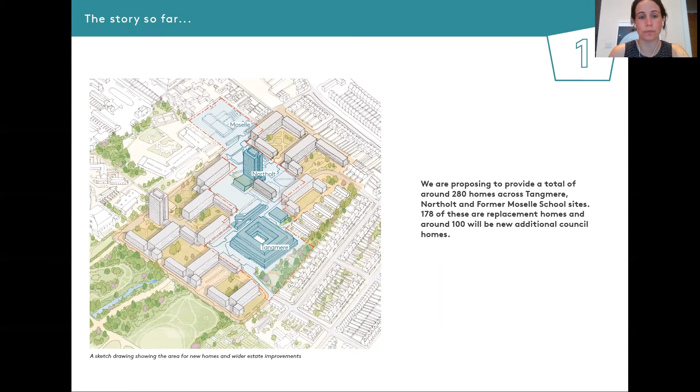In February, we presented 3 design ideas, and idea A was the most popular. But there were other elements of idea B and C that were also very popular, such as the open courtyards and creation of new safe streets.

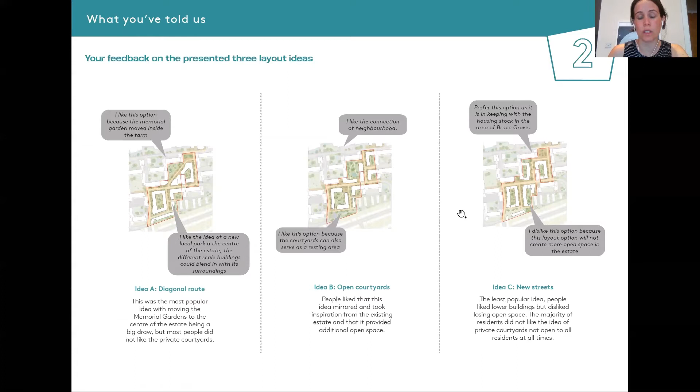We also discussed these 4 themes on the engagement in February. We talked about safe streets, active ground floors, improved open spaces, and high quality homes. All the feedback received has been processed and has informed the design evolution of the design scenarios.

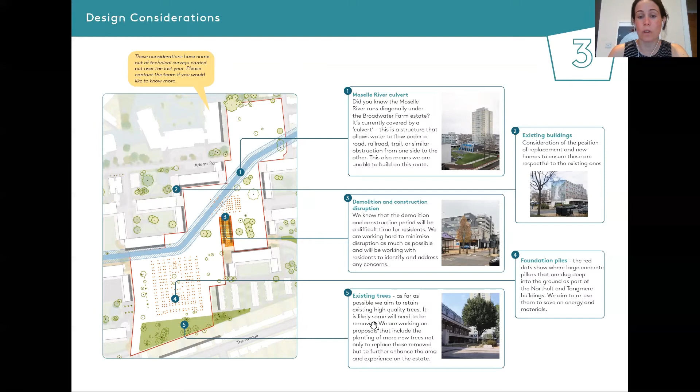We're also taking into account some design considerations across the site, such as the Moselle River running across the estate covered in a culvert, which means that we cannot build on top of the blue area. We're also being very respectful with buildings around the site area, as well as considering demolition and construction disruption, especially on Stapleford building. We're also looking at the existing foundation piles of Tangmere and Northolt, and we're looking at maximizing tree retention across the site.

We're also looking at existing policy and guidance, and the current parking situation, as well as current parking policies, are informing the design. We will talk in a second about our parking proposals for new buildings.

Based on the feedback received in February, we have refined the designs and merged them into 2 design scenarios. These 2 design scenarios have some differences, but they have some key priorities that are common on both of them. These are creating safe streets, having an active ground floor, including the reprovision of the health center, and potentially creating a new well-being hub.

Providing high-quality open spaces, including a new park at the heart of the estate, and providing high-quality council homes, maximizing larger family homes, as well as providing outdoor amenity space for all of them.

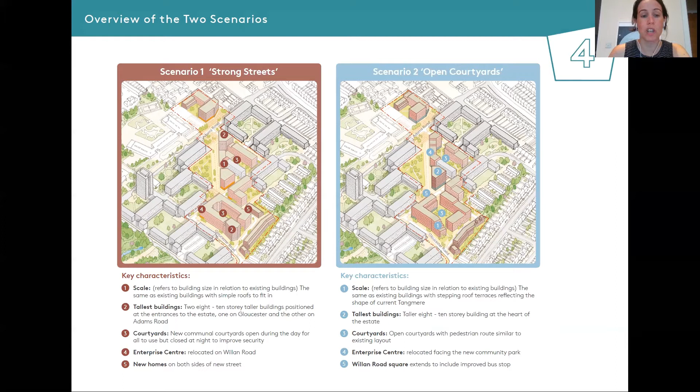But there are some differences. Listed below, you can read all the differences of these proposals. They include scale, location of taller buildings, shape and form of courtyards, as well as the location of the enterprise center.

In terms of streets and parking, we have responded to feedback received by introducing north-south roads that are more similar to traditional London streets, including activity at ground floor, such as front doors or other uses, wide pavements, tree planting, on-street parking, as well as vehicular lanes.

But we have also introduced a pedestrian-friendly street running diagonally from Adams Road to Willan Road. It would be great to hear your thoughts about this new pedestrian road, as well as how to improve the parking situation in the estate.

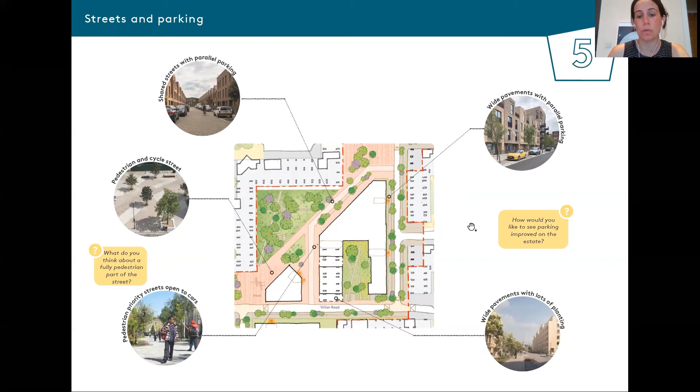This is an image that shows how this new street could look, with wide pavements, tree planting, on-street parking, vehicular lanes, and activity at ground floor.

We are aware that parking is a very important issue on the estate, so we're looking at options on how to protect existing parking for residents. One way to protect it is to create a controlled parking zone. This would prevent people from outside the estate parking in your spaces, and existing and returning residents would receive a free parking permit. We would like to hear your thoughts about that.

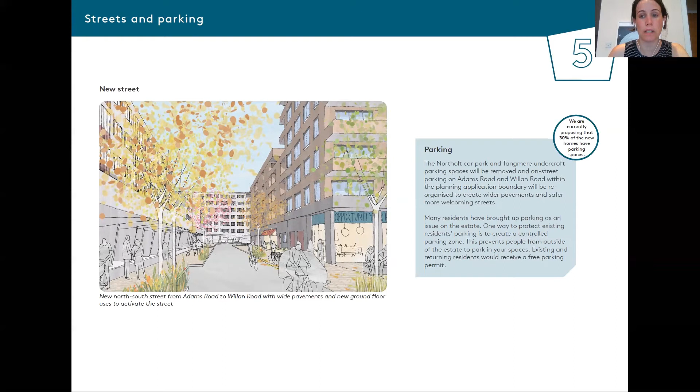In terms of ground floors, we want to create active ground floors, and this includes ground floors with residential activities such as front doors or communal entrances, but also the potential of introducing some non-residential uses.

We're studying the possibility of having a food store along Adams Road, and we're also looking at relocating the medical center in the new Tangmere building. This would be combined with connected communities and flexible community spaces, creating the new well-being hub.

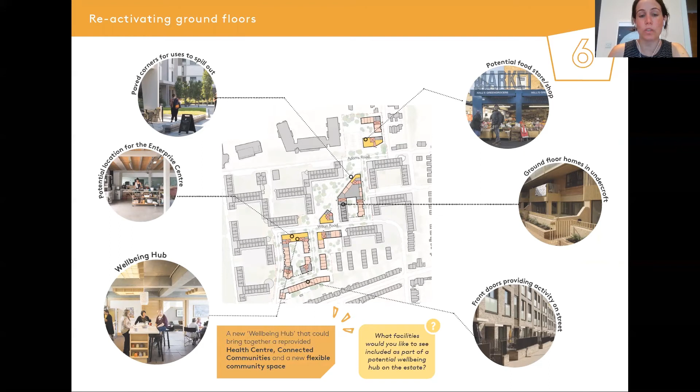It would be great to hear your thoughts about what sort of facilities you would like to see on the new well-being hub.

These two images show how these new streets could look with new activities at ground floor. The one on top is the junction between Adams Road and Moira Close, showing this potential corner activity at the bottom of the new building. The second image shows an improved Willan Road with wide pavements, tree planting, on-street parking, and some activities on the ground floors as well.

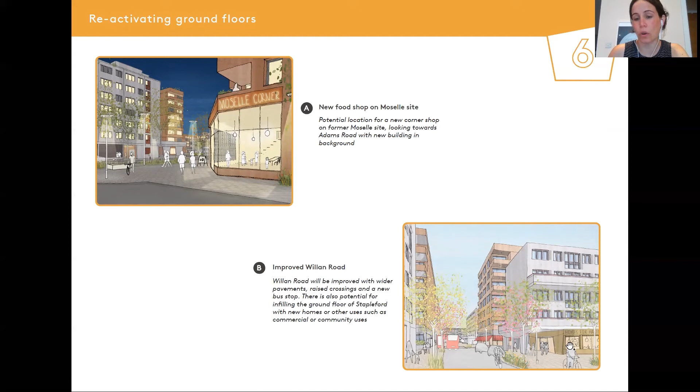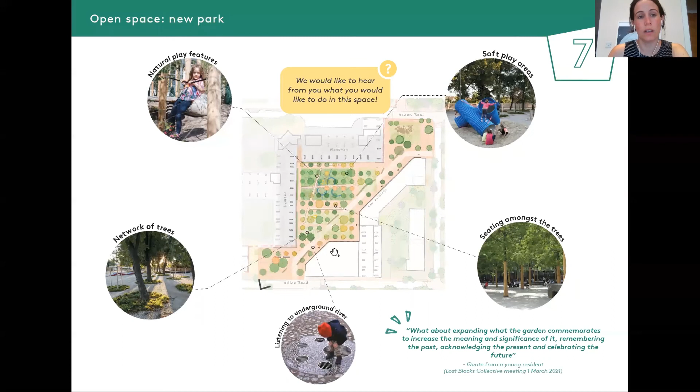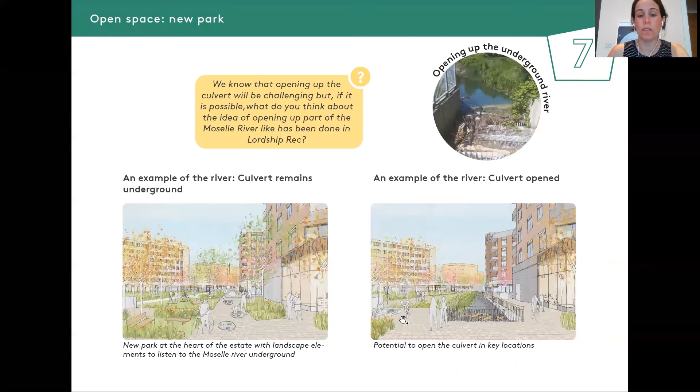As mentioned before, there is a river running underneath the estate, and even though it's a very challenging thing to do, we're looking at the possibility of opening the culvert in certain locations. In these two images, you can see the same point of view, one without the culvert and the other with the river opened. It would be great to hear your thoughts about whether you prefer it to be open or not.

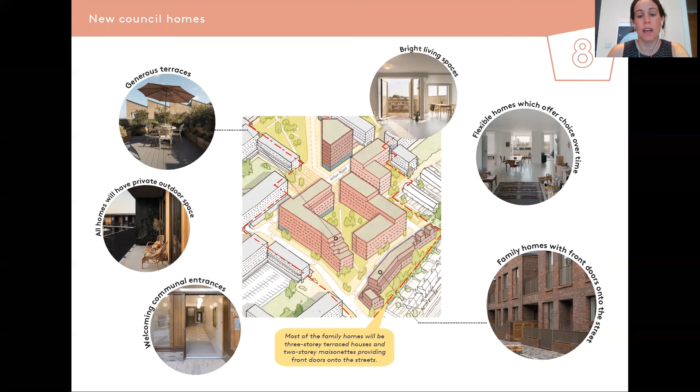New high-quality council homes is a key priority as well. So we're looking at providing flexible homes with welcoming communal entrances, making sure that all homes have access to private outdoor amenity space. We're also looking at maximizing family homes in the shape of terrace homes or two-story maisonettes.

The council has put together the Neighbourhood Moves policy, which means that if you're an eligible secure council tenant on Broadwater Farm, you're able to apply and will be given priority for a new home within the development. As previously mentioned, we're looking at maximizing the number and proportion of family homes based on current needs.

On our next event in summer, we will talk a lot more in detail about the new homes and new typologies.